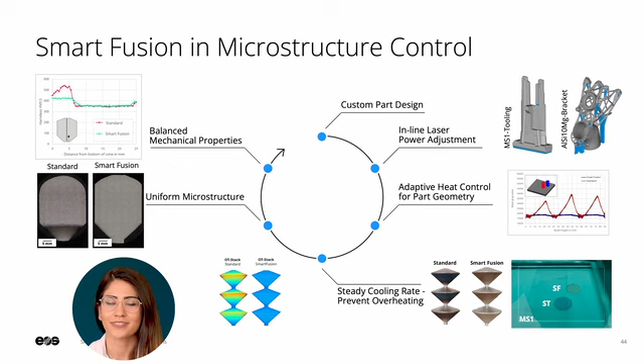When it comes to metal alloys, a consistent cooling rate is a crucial key factor for achieving a uniform microstructure, as microstructural properties are coupled and linked with the mechanical properties. Having a uniform microstructure will ensure homogeneous mechanical properties. So now, with Smart Fusion, we are able to create a complex part with homogeneous mechanical properties. Here in this slide, we are presenting to you two application parts made with two of the most important materials in additive manufacturing, and explaining how Smart Fusion can help us to achieve more consistent properties.

We have a lightweight bracket made of aluminium silicium 10 Mg. This part has geometrical features, for example, a bulky section with poor heat flux and also low overhang angles. Both of these geometrical features affect the thermal behavior during the printing process. This means we will have a different cooling rate in different positions of this part. As previously mentioned, change in cooling rates affects solidification conditions and directly impacts microstructural properties. Therefore, different cooling rates lead to inhomogeneity in properties.

Often in industries, to tackle this problem, they use post-processing steps like heat treatment for properties homogenization. Using heat treatment will increase cost per part and also manufacturing time.

The second critical aspect of the thermal history in laser powder bed fusion is the overheating over the build height. This causes super elevation of parts, which can lead to recoater contact and, in the worst case, interrupted or failed build jobs. A common solution to prevent this is to introduce a minimum layer time, which gives the material enough time to cool down after a layer is exposed. An obvious downside to this is that it increases build time and results in higher cost per part. Later on, we will also take a quick look at how minimum layer times can affect the microstructure.

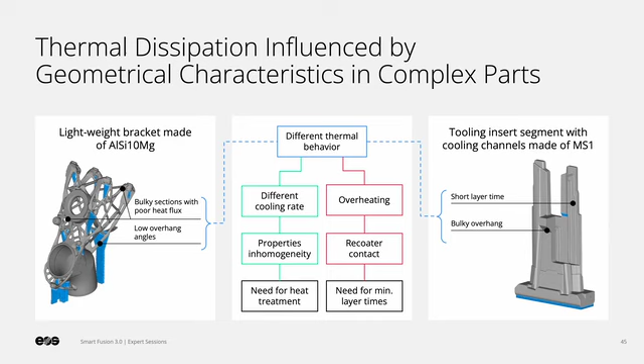A typical example of a part where an AM engineer might choose to add a waiting time is this tooling insert made of MS1. The geometry tapers off toward the top, which means that the time between exposures, often referred to as interlayer time, is getting shorter and shorter as the build progresses. This also means that the surface temperatures will rise over the build height. Additionally, there's a small overhang region in the center of the part where the heat flux is limited, and as a result, local overheating can also occur.

As illustrated, both of our selected applications contain geometric features that can cause overheating somehow. To systematically analyze the potential effects of such features on the microstructure, we use a test geometry that generates severe heat accumulation. It consists of three cones with an overhang angle of about 45 degrees stacked on top of each other. They are connected by small cylindrical pins, which also act as thermal bottlenecks. The part may look deceivingly simple, but is actually a rather challenging build. The geometry is very much inspired by previous studies on the subject, and multiple researchers have used similar geometries in the past.

The trend in this case is the further away we are from the build plate, which acts as our heatsink, the lower the energy input needs to be. This then leads to a homogeneous mean gray value for the entire part.

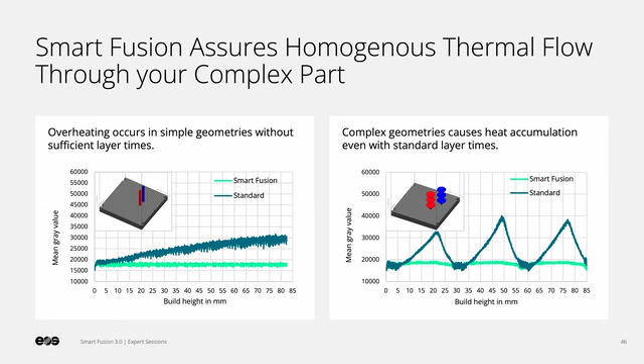In the heat demonstrator, the thermal history is a bit more complicated. As you can see, the mean gray value changes with the geometry in the uncontrolled sample. So to achieve a constant gray value, Smart Fusion needs to initially reduce the laser power as the cone radius grows, but then gradually increase it again after the maximum diameter is reached. This pattern is then repeated again and again for the middle and the top cone.

In addition to managing the heat over the build height, Smart Fusion also needs to reduce the power more in the overhang region than in the core of the part. This is achievable because Smart Fusion can adjust the power locally on a pixel by pixel basis.

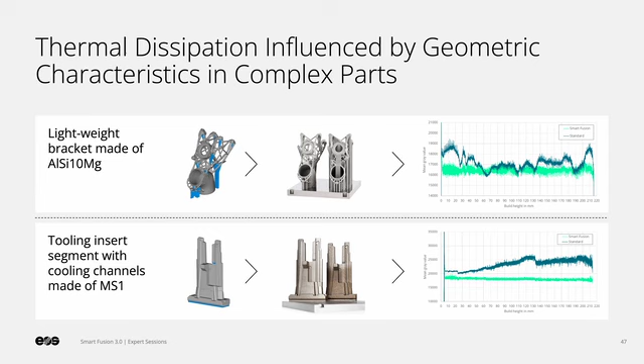It is typical for MS1 that excessive temperatures, like we see here, are accompanied by tempering colors on the part surface. You can see this in the slightly more brownish appearance of the sample built without Smart Fusion. Smart Fusion technology mitigates overheating-induced porosity like keyhole porosities.

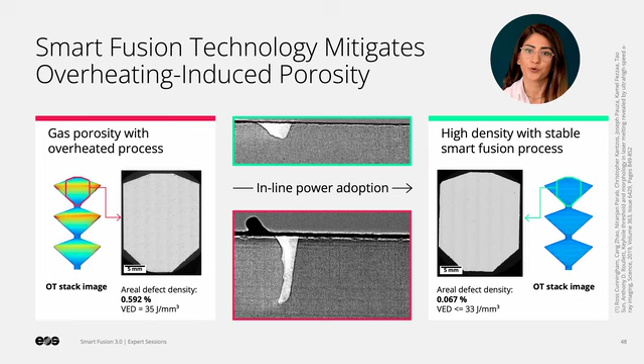Comparing the porosity level that has been measured by the areal defect density from cross-sectional images shows a 10 times improvement in porosity level, from approximately 0.6% in the sample built without Smart Fusion to 0.06% with the sample built with the applied Smart Fusion.

Let's get back to our application parts to understand how Smart Fusion can help us to achieve homogeneous part properties like microstructural properties. We first need to understand how the microstructure of AlSi10Mg forms during the laser powder bed fusion process. In laser powder bed fusion, as we know, a laser source selectively melts the material to create a melt pool. At the solidus-liquidus interface, the alpha aluminum phase begins to nucleate and grains grow in the direction of the thermal flow, which is normally perpendicular to the melt pool boundary.

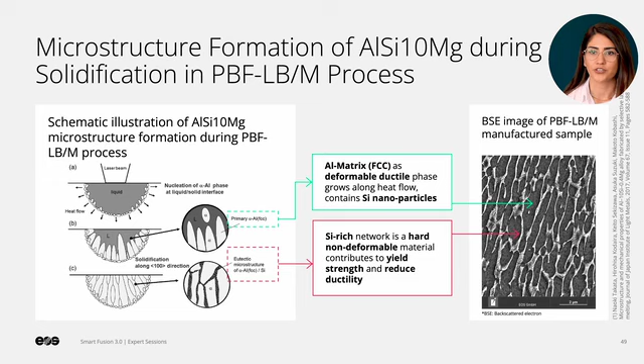Alpha aluminum phase has an FCC crystal structure, which is known as a deformable ductile phase. Previous studies have also shown the existence of silicon nanoparticles within alpha phases. At the end of the solidification phase, a silicon-rich network forms at the boundaries of alpha phases, showing that this alloy has a eutectic microstructure. The silicon-rich phase acts as a hard, non-deformable phase, and its presence leads to lower ductility and higher strength and hardness in the material.

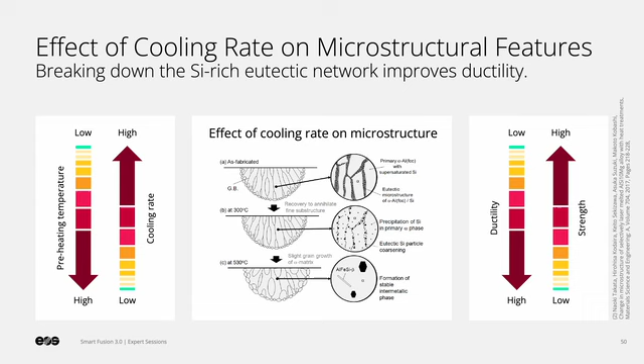Studies have shown that the preheating temperature of the building platform, which results in a change in cooling rate, has a significant impact on the morphology of the silicon network in this material. Here in this slide, we see that an increase in preheating temperature of the building platform reduces cooling rates, and this will cause degradation in the silicon network. The silicon-rich phase starts to dissolve and the network structure changes into coarse large particles. As I explained previously, this phase is a non-deformable hard phase. Dissolution of this phase and change in morphology increase ductility of the part and reduce hardness and strength.

Looking back at the heat accumulation demonstrator parts, let's see how the microstructure is affected here. We previously saw a high variation in radiation intensity in this part when we are not using inline laser power adjustment with Smart Fusion. That created overheated regions and differences in cooling rate. This simulates a similar condition for the material as using different preheating temperatures for the building platform. Therefore, a similar morphological change of the silicon-rich network can be detected also here.

Here in this slide, we see two samples, one built with standard process parameters and the other using Smart Fusion and laser power adjustment. On the left side, if we take a look at BSE images taken from different positions of the part and compare silicon-rich phase morphology, we see a strong dissolution of the silicon phase and a drastic change in morphology from network shape to coarse large particles in the sample built without Smart Fusion.

On the other hand, applying Smart Fusion results in more homogeneous thermal behavior. Comparing the BSE images on the right side from the sample built with Smart Fusion, the silicon-rich network is getting thicker and more nanoparticles can be detected in the alpha phase when we are moving from the upper side to the bottom side, where we have a larger exposure area and smaller heat dissipation area. Although a small change in morphology can be seen here, the network-like structure remains through the whole part.

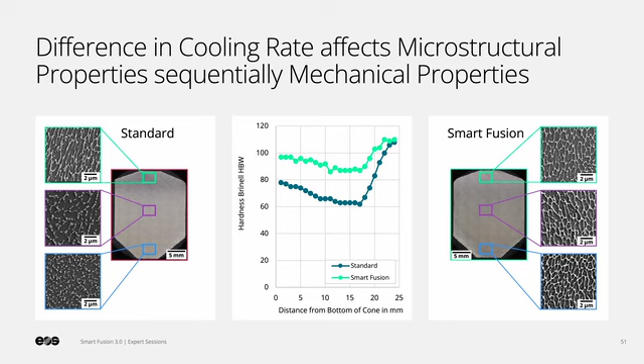A hardness profile from bottom of the sample to top has been used to exhibit change in mechanical properties and its homogeneity. The standard sample showed an average lower hardness and exhibited more significant variation in hardness as the distance from the bottom of the sample increased. The microstructure of MS1 reacts very differently to heat accumulation compared to AlSi10Mg. In fact, overheating can even lead to higher hardness under some circumstances.

In the as-built condition, MS1 is rather weak compared to the heat-treated state. Because of its low carbon and high nickel content, the martensitic phase that forms after cooling below the martensite start temperature is relatively soft. Instead, MS1 gains its strength from the precipitation of intermetallic particles. Martensite has a lath-like structure which can be revealed either with etching, like we did here with V2A etchant, or using EBSD.

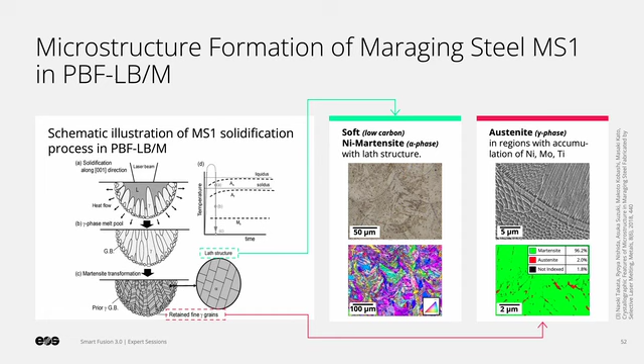In the maraging steel, a cellular and columnar solidification structure is formed due to the high cooling rates. Local accumulation of nickel, molybdenum, and titanium leads to the distinctly brighter appearance of cell boundaries. This also explains the presence of retained austenite, which is stabilized until room temperature due to the local differences in the element concentration. As-built austenite contents up to around 10% have been reported depending on the processing condition.

We observed a very interesting effect when we analyzed the heat demonstrator built without Smart Fusion. While the middle and the top of the sample show a typical etching response for the as-built state, the unusually dark region above the thermal bottleneck caught our attention. A drastically different etching response like this usually hints at a severe change in microstructure. The reason for this altered microstructure is an in-situ heat treatment leading to local precipitation during processing.

What plays an important role here is that this job was built with a minimum layer time. In other words, the machine waits every layer until a fixed time is expired. As a result, there is plenty of time to cool down between layers and form martensite in the bottom of the cone, since the exposure area there is very small. The blue curve shows this schematically. The martensite in this region can then be tempered during processing of subsequent layers, and by the heat that accumulates above the thermal bottleneck. If the in situ tempering is severe enough, it is plausible that precipitation can occur.

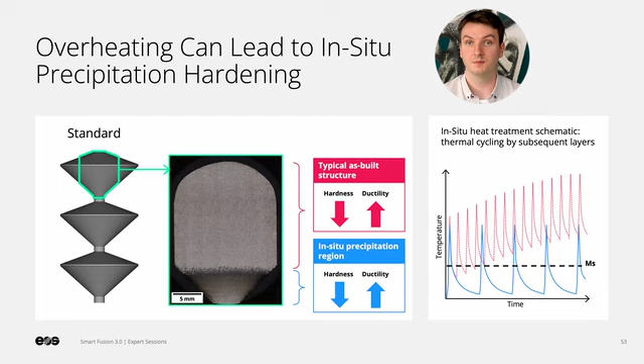As the diameter of the cone grows, less time is available for cooling, since more time is devoted to the actual exposure. As a result, the initial formation of martensite is no longer possible, and the subsequent in situ tempering is prevented. Now, the question that remains is what happens when we use Smart Fusion to produce the sample. In total, we have tested 4 combinations of minimum layer time and process control. Without Smart Fusion, we did not achieve the desired results because the part is not buildable at all or has the previously discussed microstructural changes.

The different microstructure in the dark region leads to a hardness peak close to a level that is usually only achievable after aging. This supports our suggestion that precipitation is taking place during the process. With Smart Fusion, the part can be built with or without minimum layer time. In both cases, the etching response appears like the typical MS1. The sample with minimum layer time does show a hardness increase towards the bottom and the top. The reason for this is the same as before: long cooling times and tempering by the next layer, although it is not as pronounced as in the standard sample because Smart Fusion prevents strong heat accumulation.

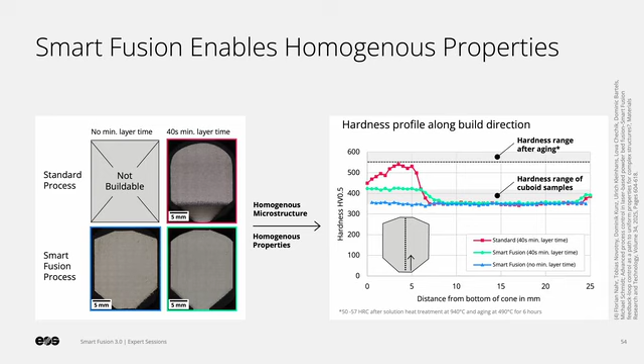The sample built without waiting times shows a very homogeneous hardness profile regardless of the build height. This demonstrates the high potential of Smart Fusion. Not only can challenging parts be printed fast without waiting times, but uniform properties can be achieved at the same time.